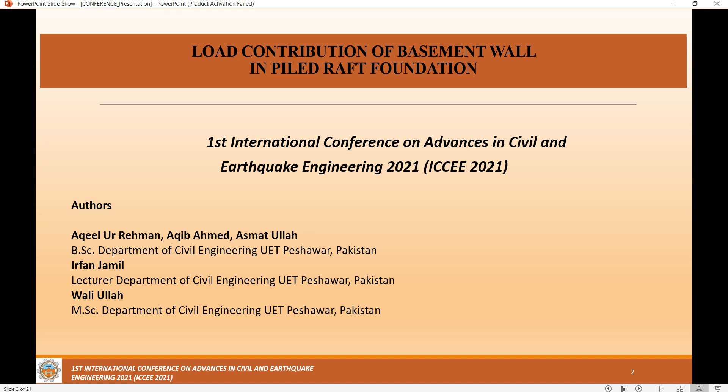First of all, the introduction. Nowadays, population increase and urbanization is a major problem worldwide, and everyone wants tall buildings to use the land effectively for residential and commercial purposes.

We know that tall buildings have multiple basements, at least 2 to 3 basements, for parking and storage facilities. In tall buildings, the major forces are lateral forces such as earthquake and wind forces, which are mostly the governing design criteria for the foundation or the structure.

But conventionally, the basement is not considered to resist these lateral forces and is only designed for soil backfill pressure, which ultimately leads to uneconomical foundation. In practice, the basement shows resistance to load, especially in resisting lateral load induced due to earthquake

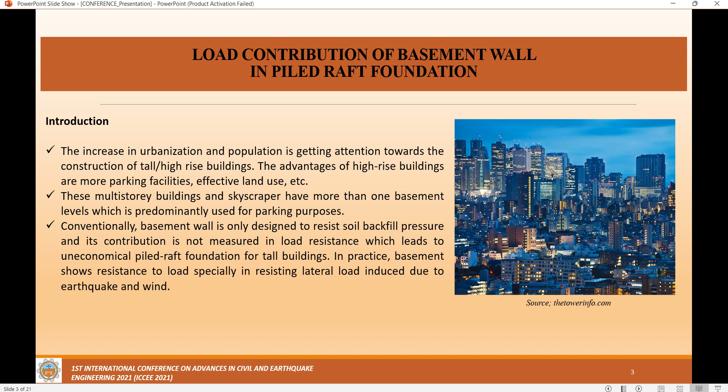and wind. Many researchers have worked experimentally and numerically on the lateral response of Piled-Raft foundations. They concluded that raft and piles both contribute to the lateral load resistance. However, the current literature lacks study on the basement walls.

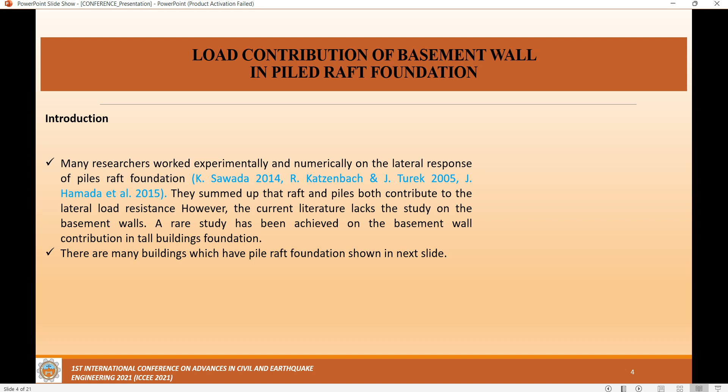The question arises: how can the basement provide resistance to lateral load? For this, Harry Poulos and Harry Chow gave 3 reasons in their conference paper: shear resistance along the sides of the basement walls, passive resistance of the soil in front of the basement wall, and bearing and shear resistance at the base of the raft slab, which provide additional stiffness and resistance to the structural loads.

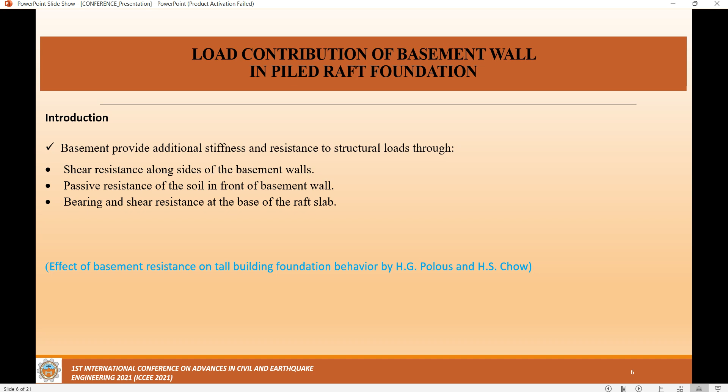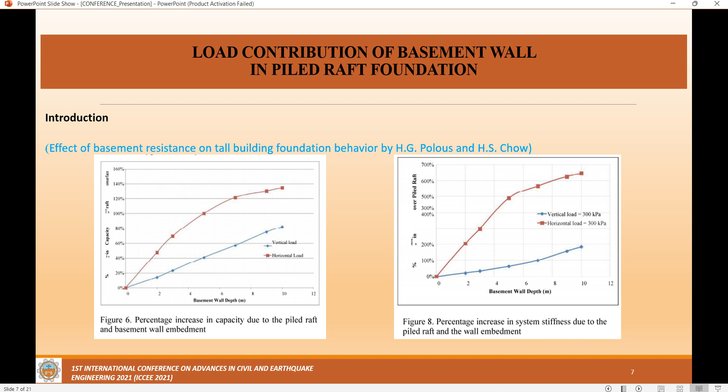Here are some of the conclusions from Harry Poulos and Harry Chow's conference paper. From these figures we can clearly see that the capacity and system stiffness of the Piled-Raft increases as the depth of the basement wall increases.

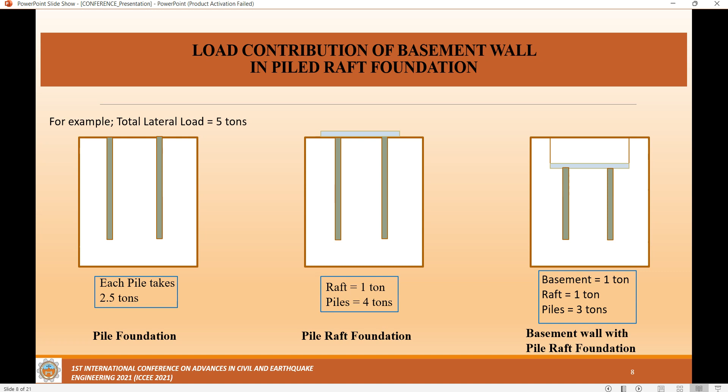This slide shows the hypothesis we assumed before doing our numerical study. For instance, if we applied a total lateral load of 5 tons, then in the case of a basement wall with Piled-Raft foundation, all of the load will be distributed among each component. But in the case of pile foundation, each pile takes 2.5 tons and all the load is transferred to the piles.

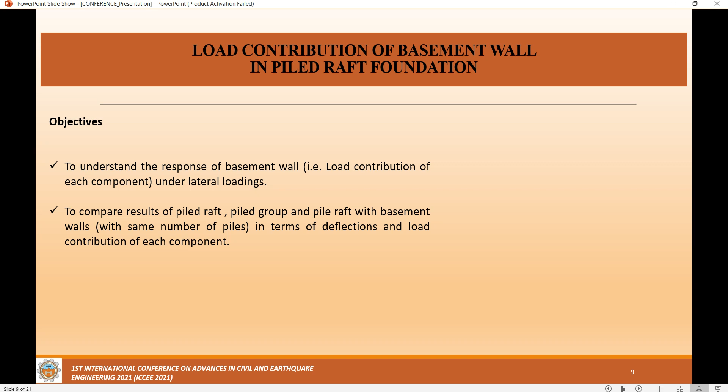From the aforementioned review, we mention 2 objectives: to understand the response of the basement wall under lateral loadings, and to compare results of Piled-Raft, pile group, and Piled-Raft with basement walls in terms of deflections and load contribution of each component.

For the numerical modeling, we use Plaxis 3D, a finite element analysis program. In Plaxis 3D, there are different models for the soil, such as Mohr-Coulomb model and linear elastic model, but we use the hardening soil model as it is more advanced and able to generate more realistic soil response.

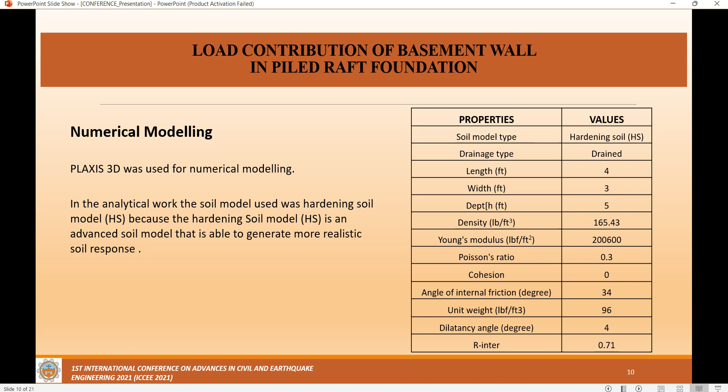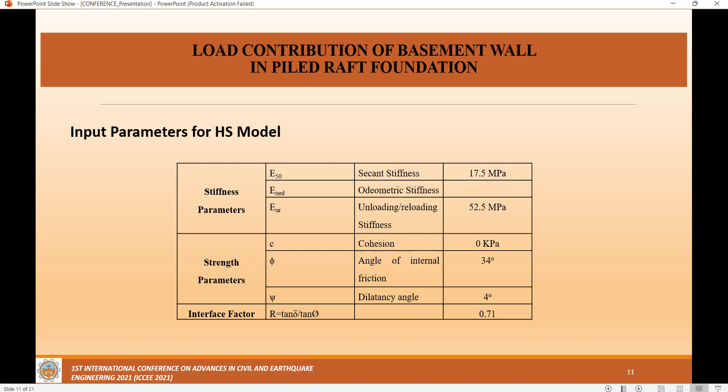The most important input parameters are given in this table. Firstly, we have to define the stiffness parameters: secant stiffness modulus, oedometer stiffness modulus, and unloading-reloading stiffness modulus. Secondly, we have to define the strength parameters: cohesion for the sand is 0, angle of internal friction from direct shear test is 34, dilatancy angle is 4 degrees from the equation, which is phi minus 30, and the interface factor, which is 0.71.

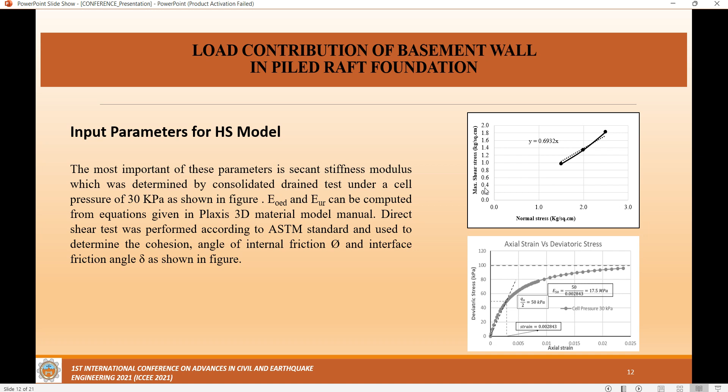Using different equations, we can also find the oedometer and unloading-reloading stiffness modulus. The direct shear test is shown in the above figure, and by this we can find the cohesion, angle of internal friction, and interface friction angle.

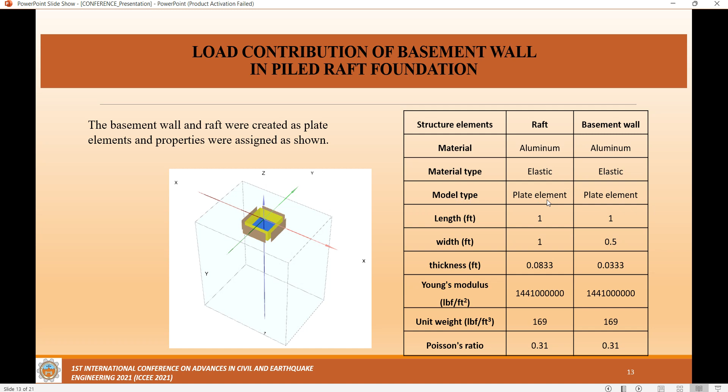The basement wall and raft were created as plate elements, and properties were assigned as shown in this table. Raft and basement wall material was aluminum. Material type for both is elastic, and model type for both raft and basement wall is plate element.

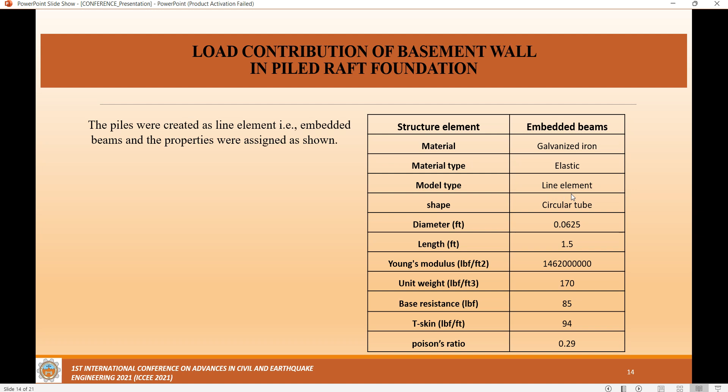Piles were created as line element embedded beams, and the properties were assigned as shown in this table: galvanized iron for the material, elastic for the material type, and line element for the model type. Medium meshing was used for the analysis because we have to reduce the time for the analysis and to easily run the analysis.

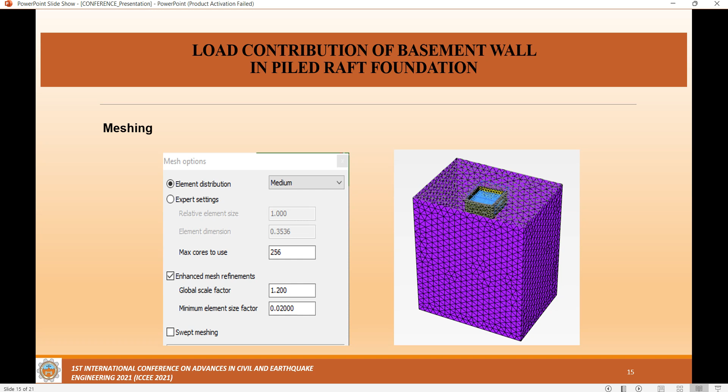of the basement wall. For 0.5 mm displacement, pile group resists only 150 Newton, and Piled-Raft sustained up to 500 Newton, while 2700 Newton lateral load was required for 0.5 mm displacement in basement wall with Piled-Raft. So by this we can conclude that due to the basement wall, the overall foundation stiffness increased.

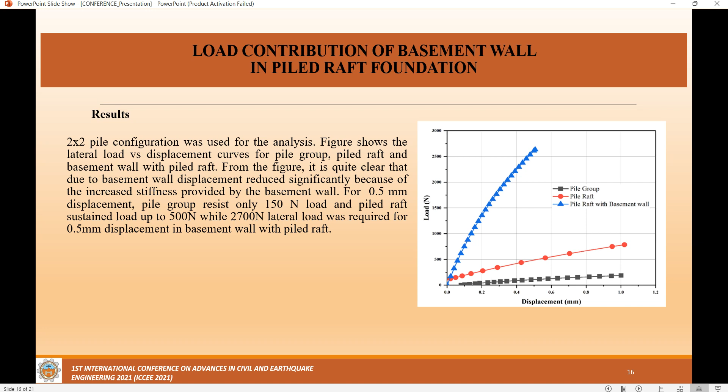So using this research study, we can reduce the number of piles, or we can reduce the dimensions of the piles. It also shows that the resistance to lateral load that may be induced due to earthquake or wind is also resisted by the basement wall.

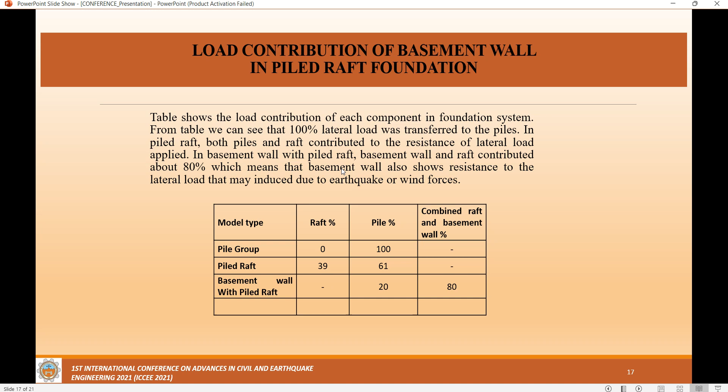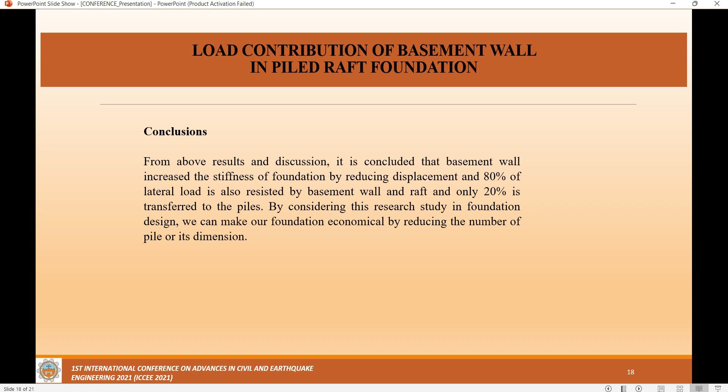From the above results and discussion, it is concluded that the basement wall increased the stiffness of foundation by reducing the displacement, and 80% of lateral load is also resisted by the basement wall and raft, with only 20% transferred to the piles. By considering this research study in foundation design, we can make our foundation economical by reducing the number of piles or their dimensions.